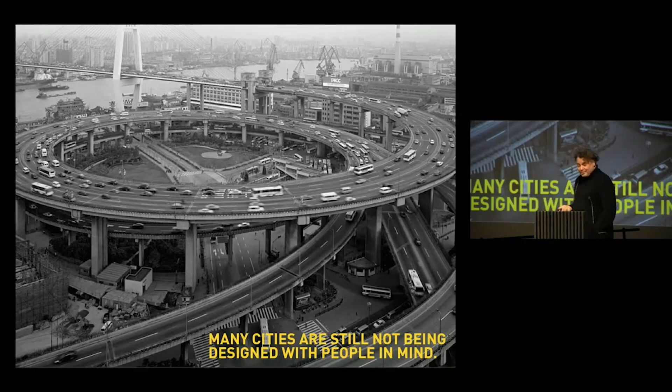Places are becoming increasingly homogeneous, increasingly generic, and you don't know if you're in Asia, Europe, South America, and so on, because similar types and similar language and similar responses happen everywhere.

And obviously, with the aspects and emergence of climate change, we are all at risk. This poses a series of challenges for us architects and urban designers that are common in many different places.

Certainly in our practice, we feel there are two fundamental challenges that relate to cities today. One, that I'm not going to talk about, is what to do with suburbia—the sprawl of cities related to the popularization of the car, which creates one type of city. At the opposite end is high density and tall buildings, and how we are living more compactly, and how you create good places with these difficult types.

So we started with this notion of the skyline, and the tall buildings as a sort of fabric, and what is the sort of city that this generates.

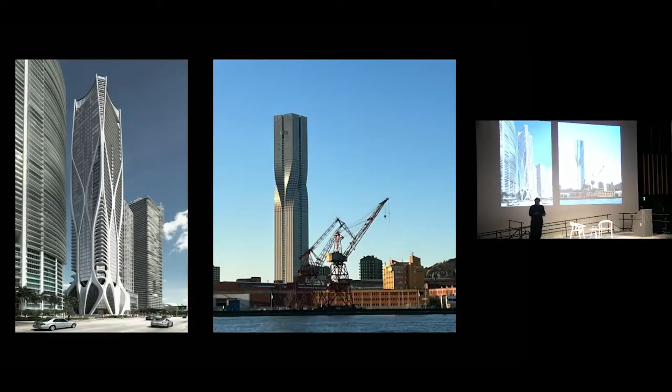Like Zaha did in Miami, or the SOM building in Gothenburg—well, these buildings could be more or less interesting, but they are aloof, self-referential, and objectual. It's very difficult to believe that you can create a city that is mostly fabric with this type of building, because their purpose is self-referential and a little bit about seeking attention. We are on a slightly different wavelength.

We are perhaps in a different tradition in our practice, one that tries to combine the pressures of densification and height with a different approach. Can these buildings be part of the fabric of a city? Can they be contextual? Can they step back in relation to their objectual nature? And what are the different strategies you can apply for that to work? These are not solutions—perhaps only partial answers to an anxiety about the fact that these buildings are part of cities today. Is there a way of dealing with them that makes them part of the fabric?

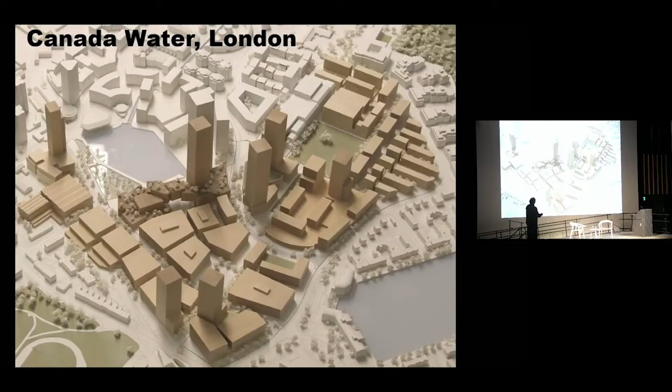This is a master plan that we have been doing for 15 years in London, in Canada Water. It's called that because it's where timber that came from Canada, or went to London from Canada, was stored. We have been working on this master plan for a long time, and we were also the architects of these two buildings.

That is phase one. This is an area that is incredibly central. You see Tower Bridge there, that's the City of London. Then you have the river, and it's this area here, and we're talking about this building in particular, this couple of buildings. It's a part of London that's very central but feels a little bit secluded, a little bit detached, due to transport and other conditions.

That's an image of the building, and we like to call it a single tower. This was part of the master plan, which includes a cluster of other tall buildings in the area. The typology has a podium and tower on top, which we began to question when we started the actual building design—was it a hybrid building, with office and workspace in the lower floors and a residential tower on top.

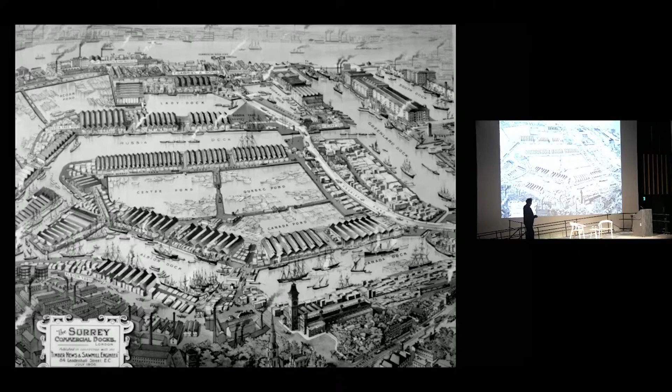It's a context that, like many in London, sits in between conditions—lots of Victorian and utilitarian 19th-century architecture, where this was once a working dock, but at the same time has a presence in the skyline due to its proximity to the river. These were the docks when they were working docks, and this is the dock office—one of the remaining Victorian facilities still there.

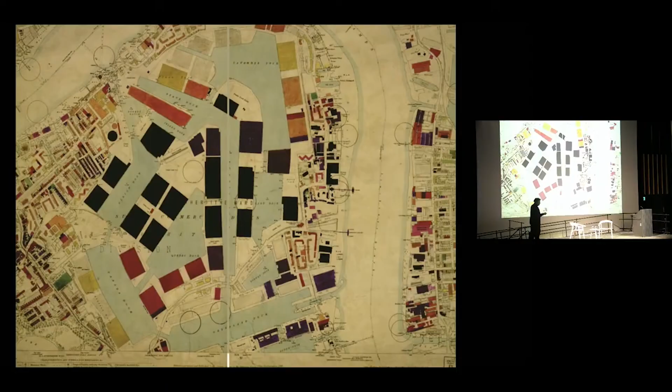This is a fantastic map of the bomb damage after the Second World War. What's interesting is that black shows what was destroyed, and that's where things remained. What's interesting about that map is the combination of big things and very small things—the big things were the sheds, and then you see the grain of houses and docks, the more nimble buildings of the Victorian era.

So our project tried to mediate between these scales of large things and small things, with a building that, by its size and height, was going to be a big thing on its own. It's a core preoccupation of ours in the practice—how, as buildings become larger, you don't lose the small grain of things. You still have, at the very least, mid-grains. If a small grain isn't possible, how do you break down these buildings to establish a mid-grain condition.

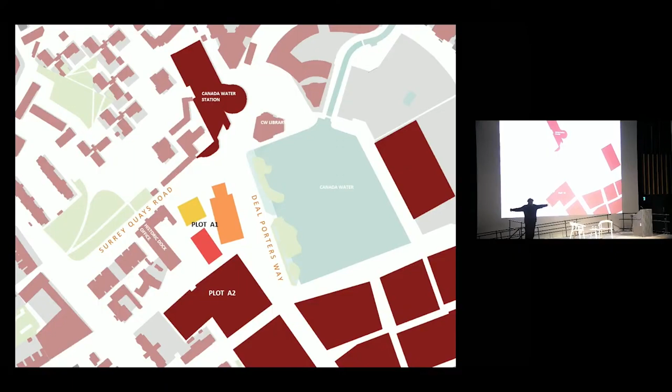Breaking the mass into smaller components allows us to create a transition between this larger scale and the smaller scale—that's the historic dock office I pointed out before—establishing a literal transition between things addressing the larger scale and things addressing the smaller scale.

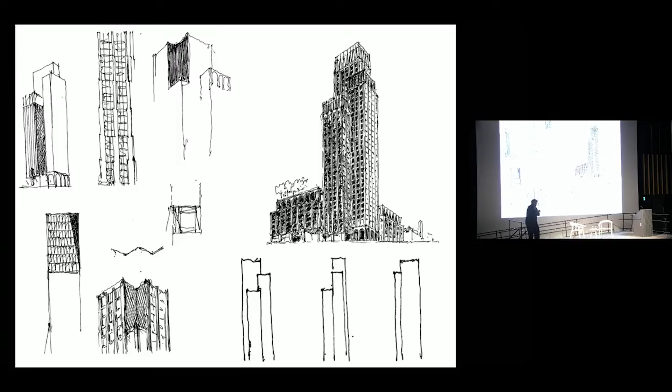This was a sort of inspiration you'll see elsewhere in tonight's lecture—how a building that could be a singular thing becomes a bundle of things, a tower made of three towers. This breaks down the scale of the tower, but more importantly introduces the notion of orientation: seen from different places, the tower looks different. This lets the building perform one of the fundamental roles of a tall building for us—the legibility of a place from farther away, so you can locate yourself and say, over there, 500 meters away, is where the tube station is. If I'm looking at one side of it, I know if I'm facing north-south or east-west.

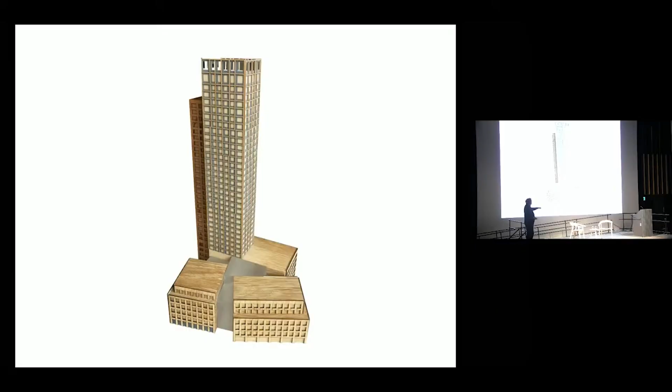That allows, in a sense, the configuration of the internal, also a sort of a design of inside-out in relation to the tall building. So it became a group of buildings that have warehouses for workspace, brick warehouses for workspace in the lower floors. There were 3 brick warehouses, and then the tower interlock on the side that was also broken into 3. So we sometimes say it's 1 building, but it's 6.5 buildings.

3 warehouses, 3 towers, and this connected piece in the middle. What this generates is that when you see this from afar, sometimes you see 3 forms, sometimes you see 2 forms, and sometimes you see 2 forms from the other side. You see that then the lower bit of the warehouse starts to help with the transition to then the scale of this kind of a building, 19th century and early 20th century.

So then this building has a back and a front. It has a response towards the dock office and another response towards the water and the dock. And then as you see it from afar, then again, sometimes you see 2 forms, sometimes you see 1 form and so on, like here from the park. Sometimes you see 1 flank, sometimes you start seeing the 3 forms, interlock, and so on.

So it's, at least in our view, in our opinion, a tower that is responsive to how it sits in the city. And you can literally orientate yourself in relation to where you are seeing, if you are seeing from this dock office, or from docks, or from the water.

But another thing that we were wondering when we were doing this one, another tower that I'll show you later, can a tower be contextual? Or can a tower be of its place? Or can all these buildings always be kind of self-referential and so on?

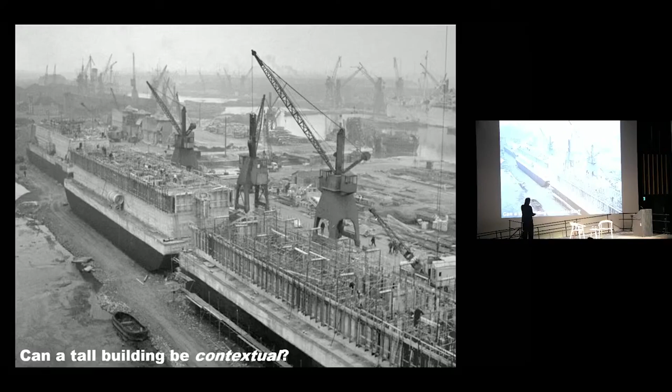So this is a photograph of the docks when they were still working. And when you walk around this area, you see a lot of these things. You see a lot of remnants of the steel kind of basculant bridges, cranes, brick buildings with this kind of interlocking of brick and metal and timber that was obviously one of the sources of inspiration for this interlocked tower.

And so on, and from the language that then we were exploring, sometimes in these models, so how the towers started to become kind of a reference to this architecture of the area, but obviously done today with a unitized and modular construction that then allows to have this sort of a metal tower that feels industrial, has a relationship.

And sometimes you can walk close to those red bridges, and then there is a connection between that path and then this tower of the 21st century.

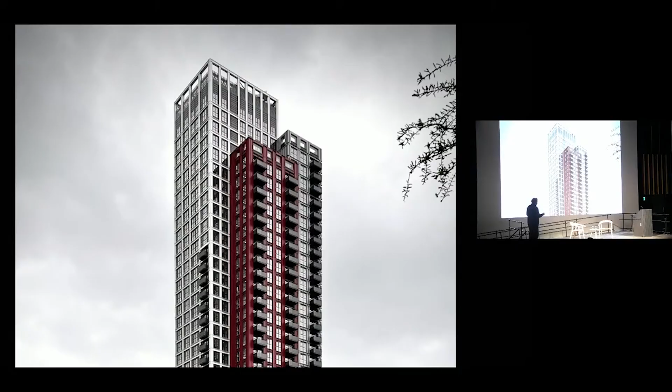And you get this layering then of a brick warehouse, that then when you are closer to the ground, and then this metal tower, that then is a sort of an interlock of forms, generated with panels, sometimes more vertical, sometimes more gridded, that then generates a place that, well, from this side you see the 3 towers, from the other side you see only 2.

You have a connection with this new red bridge, and there is a basculant bridge just behind us that generates a sort of tower that, in our view, feels of its place.

And that's a strategy that we're also trying to apply in a project that we are doing right now here in Toronto, in Quayside. It's a competition that we won not too long ago, and we have the lowest tower in this ensemble, but it's fine. And it's interesting because it's sort of a central location.

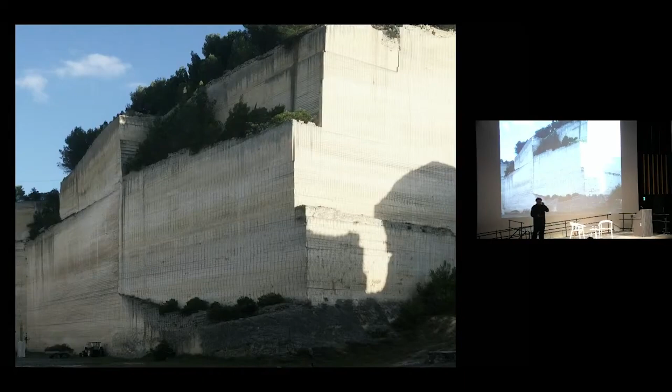And obviously, when you are doing a tower in Toronto, the most obvious reference is a quarry in Italy. So just check the size of the structure, just to grasp the scale of this quarry in Matera.

And we were interested, because it's perhaps one thing that also runs through some of our work, this notion of step forms. And the step forms would happen when you have horizontal ledges, that then greenery starts happening there. And that was one of the formal strategies, how you make these big things broken into smaller things. You start introducing human scale in large buildings.

So these were some of the sketches that we did in the early stages of the project, in which, as the building comes to the ground, it's almost sculpted and carved, and you have this step form that then generates a series of terraces where greenery can basically happen. And that greenery relates to, in the overall master plan, SLA, the landscape architects, have proposed this urban forest and how that can literally go up the building.

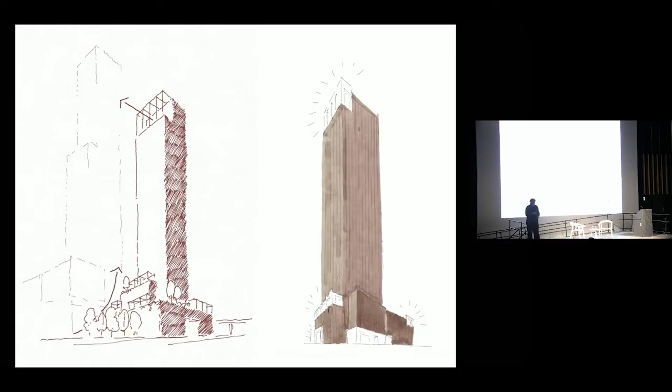Above that, the building starts to become a little bit purer, but then is punctuated by this series of small elements, almost little jewels that are, in a sense, small pergolas, pavilions, entrances, porticos, that once again bring a smaller scale into a large building.

And the important thing for us in relation to each of these things is that they have an urban role. Some of them are entrances, literally addressing the street. Some are pergolas and pavilions that relate to amenity, places where we gather, or this one we call the lake room, which is a sort of amenity space at the top of a building.

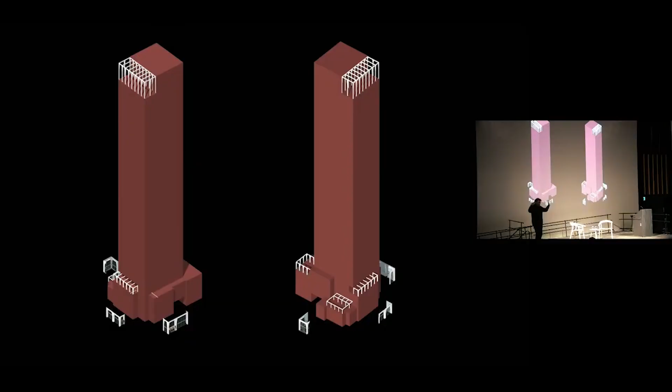So these devices do two things. On the one hand, introduce a small scale in a big thing, like some of those cornices that we were seeing in the Louis Sullivan buildings, that have that role. But the other thing, again, is to give orientation.

So when you are seeing this building from the lake, there's going to be this room at the top. If you are seeing from the city, from downtown, you will not see that. So it's a building that has a back and a front, a back and a side, giving orientation to the whole building.

So they have different degrees of civicness, if you like, that we apply as a family of devices, a family of elements. Some of them are really big, or rather big, relating to an entrance for a community center. Others are more modest, an entrance to the residential part, and then there's a series of other elements that happen in other parts of the building.

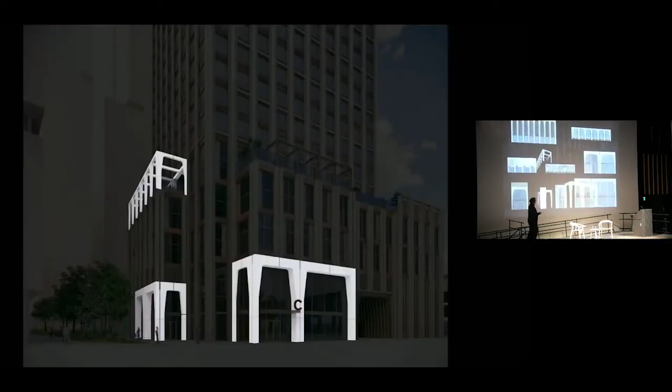So these devices have an urban role — some of them are entrances, some are terraces, or at the top of a building generate a kind of overscale rooftop loggia, because, in a sense, it's at the scale of being there, but it's also at the scale of the mega urban room that is Lake Ontario.

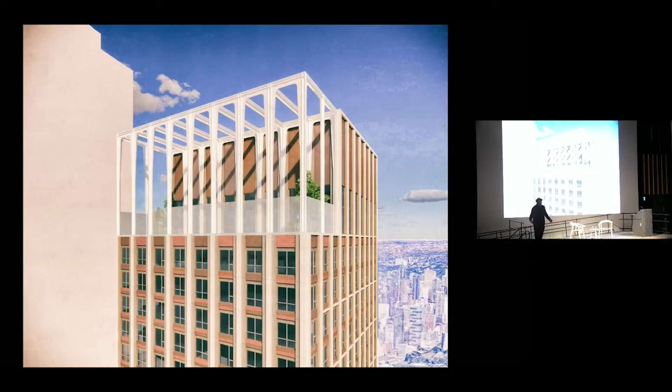So then, if you are close to the ground, the building is curved and softer, with all this greenery going up, and the form is perhaps less clear because it's curved — it's Matera-like, it's quarry-like. As you move around, some of these devices addressing the street start to become clearer, giving a sense of direction of where you enter and where the civicness of these elements is.

And then, as you start seeing it from far, the building starts to become calmer and more rigorous and elegant in our view — hopefully timeless — present with that oversized rooftop loggia that probably, in a few years' time, will be a really nice place to look towards the lake.

Then what happens when you have more than one building? You have the opportunity to have three, four, five buildings, and then you have the pleasure of playing with the space in between buildings. Like in this sculpture of Giacometti, with these five figures — their individual figures are interesting, but it's the tension, proximity, or distance between the figures that generates the overall composition.

Or Morandi again — in his etching it was really interesting because it was emphasizing not the bottles, but the space in between the bottles.

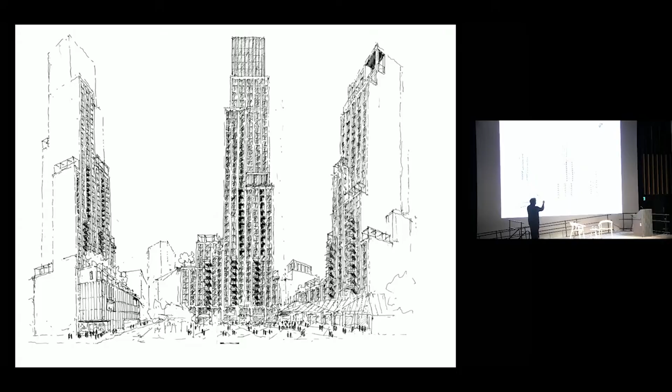When we are designing groups of buildings, you start having the possibility of looking at how three buildings come together. In this sketch for the Christie Cookie master plan we did some years ago, these three buildings are a family, but the role of the building is what happens in between.

If you go to the Dominion Center, you have these buildings and that funny-looking golden one that I think is actually quite cool, you have this group of things looking up. In the case of our Christie Cookie project, you have three buildings, and two or three more in the context, that frame the space as you look up, but perhaps more importantly, frame the space where you're looking down.

They become landmarks—not landmarks in the sense of perfume bottles marking the land where we meet, but because these buildings are literally shaping public space. The important thing, in our view, is not the three towers themselves. They are going to be cool and beautiful and elegant, but the most important thing is that from afar, you see this group of three buildings and know there's a square there, marking a point of public space. We've applied this strategy in several projects.

This is one in London, called Key Bridge. This was, I think still is, the highest density residential development in London—super high density, with really tall buildings for London. They're kind of funny for Toronto; they're only 36 stories, which is a mid-rise building here. But for London it's tall, or tallish, as we like to call them.

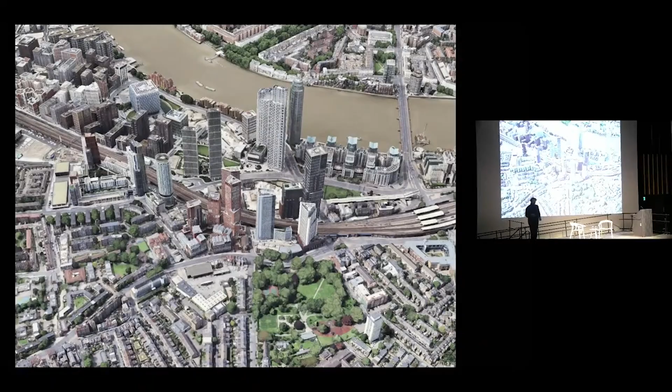This is a very interesting hinge location in London. There's all this new development over there, and that's the American Embassy. This whole area is called the Nine Elms, an opportunity area—one of the zones in London with a densification program. There was an extension of a tube line, and several opportunity areas were defined in the London plan. We won a competition to do this project here.

Depending on who you ask, it was on the wrong side of the tracks, or the right side. We think it's the right side, because here is what's called a conservation area—terrace houses and a park. So the building literally hinges and transitions between this new London and this old London. The project has a role in mediating between these conditions.

If you walk around, there are what we call mansion blocks—mid-rise buildings, two or three remaining in the area—and some at a terrace house scale. This is a pub, a brutalist building that exists on the site, very interesting. We tried to keep it but it was impossible for many different reasons I can expand on later.

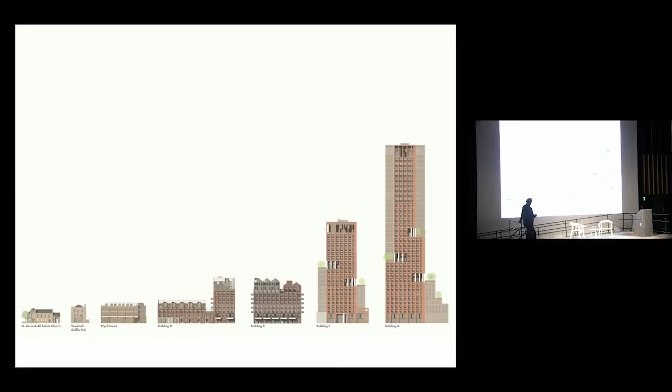What we said is this project could be what we call a typological ensemble—depending on where you're seeing it from, it responds differently. You have a bit of the scale of three or four stories, a bit of the mid-rise scale with these mansion blocks with interesting white things on top, and a bit of tall buildings. So you create these different typologies coming together on the site, giving a notion of transition, but also, importantly in a high-density development, a sense of choice.

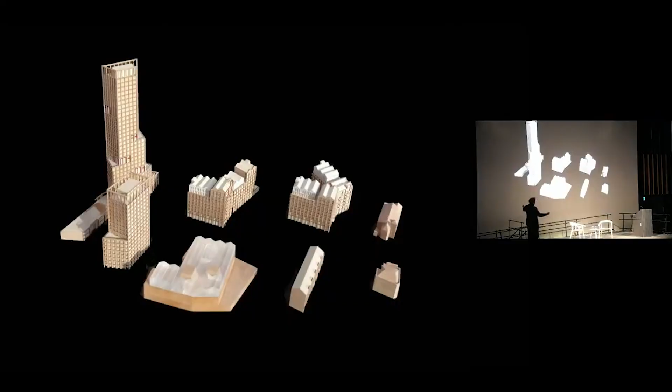You might live here, you might live here, or you might live here. You have all these different typologies of buildings, but also typologies of homes that can happen there. So we studied all these buildings separately. There are buildings that are small scale, mid-scale, and large scale, all coming together in a very high-density development, in which a third of the site was public open space, making the whole thing work incredibly well in planning terms.

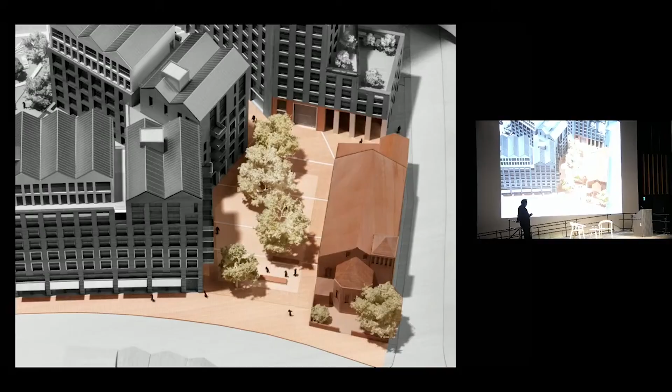So this generated the possibility of shaping the spaces using the buildings to do so. This was a Victorian church that was neglected, around which we did a new square. That square was faced by one of these mansion blocks, a 36-story building. But when that 36-story building lands and comes close to this building on the street, that is only 4 stories, you see a building that is literally stepping down to meet the scale of the Victorian church, with other datums at 9 stories relating to the mansion block.

Then you crop the view, and there are another 25 stories above that. What's interesting is that for most normal people, not architects, normal people walk like this, not like this, because you might hit yourself if you do. So as long as the space is properly shaped, the buildings are just part of the fabric. That's, in a sense, what we feel happens there.

Similarly here, the buildings are disposed to generate this large space, above which there's a 24-story tower. But the role of this whole composition is actually to frame this little building over there — the Victorian church, and another building that was a listed Georgian terrace house. So the role of this large, high-density complex was to incorporate pieces of the history of the site into a wider composition that is legible, that is, literally, a piece of city.

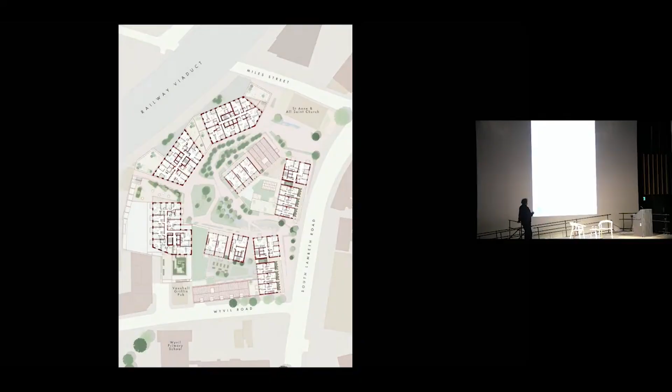But the thing we really like about this is the spaces in between, and how the group of buildings generate these peculiar silhouettes and peculiar spaces — we spent a lot of time just sculpting the air, using the mass to create interesting space between the buildings whether you're looking down or looking up.

That tries to pose the idea that you can do tall buildings of that scale that feel relative. They have a lineage and connection with this mansion block, this richly textured architecture of the end of the 19th century, creating high-density development that's trying to be more in dialogue with this old London, but also recognizing the scale of this new London that's emerging. We also tried to do that here, with this group of buildings that shape a space.

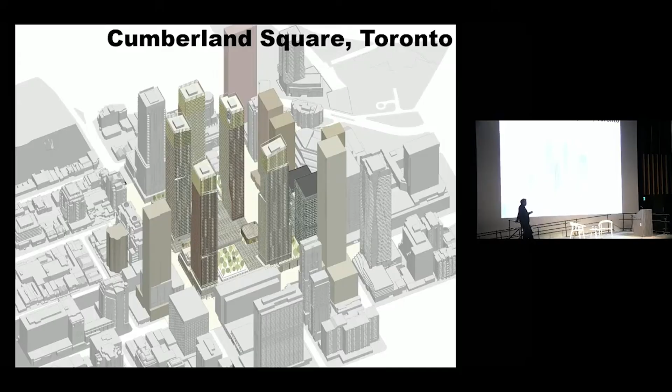This is the first project we did in Toronto. It's a competition we won, in Cumberland Square, Yorkville, or whatever it's called, because it's a very complex site in which we were very excited, and we were invited, and we won the competition, worked on this for a while, but then land issues — it's a very complex project. We started with these 5, I think 65 stories or so, 70 stories, a family of buildings.

Some of them have funny heads and share kind of haircuts. Some of them look a little bit like that, or turning around — they're figural. But the important thing is that they're a family, because we weren't interested in them as individuals. We were interested in them as a group.

They create a group, a little bit Rockefeller Center-like — not in the sense of Rockefeller Center itself, but it's interesting because it's a piece of city in which all the buildings are very similar. Some are taller, some are lower, but they share a DNA. That's what we were interested in here.

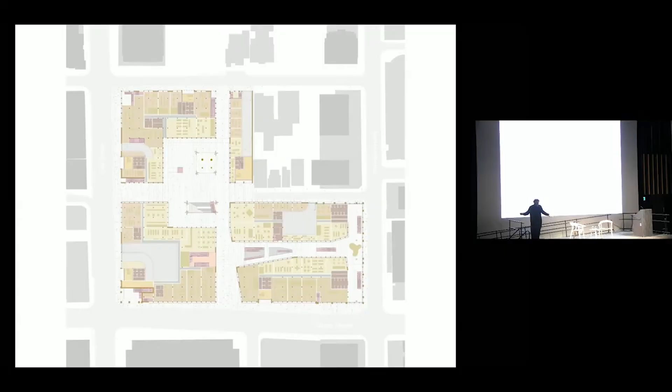The most important thing about these 5 buildings was that they shape a space in between — what we imagined could be a sort of covered square, with the footprint of 5 tall buildings, but when you're there, really that's not what you notice. What matters is the space, again, the space in between.

So you have 5 buildings — one of the things we've tried to do several times — shaping that space. It's a space you go to and a space you go through, because it was also a route through, in which we were interested in how the facades facing the square belong to the square, not to the buildings.

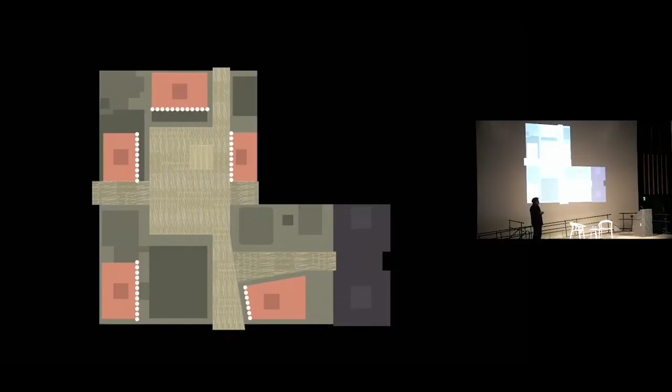A la Santa Maria Novella, we said we should have marble, white marble, on that facade, so those 5 facades for those 5 elevations share something. Of course, with value engineering, it was never going to be marble, but it was going to be white — white because it catches light differently than the other side. So that facade was the primary one, and the others were secondary.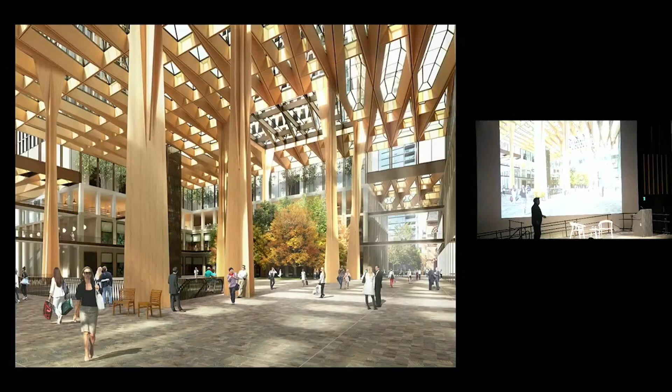The 5 buildings together shape a space, create a space that we felt would have a very interesting group of golden, brass-like metal lanterns at the top. But the most important thing was this covered square that you could go through, and on top of that were 70-story towers that, funnily enough, were secondary to this covered square.

But then we got to the last challenge — when you have 15 towers, 20 towers, 25 towers, when you're designing a piece of city, not just a block with 5 towers, but a whole district — how do you deal with putting a lot of towers together? That's challenging, exhilarating, and scary at the same time.

In cities like this, I've heard you have certain pressures about building homes for Torontonians. We have the same issue in London. It's a fantastic problem to have, because it's a problem of successful cities where people want to be, but it's a problem nevertheless. And then, how do we always provide homes.

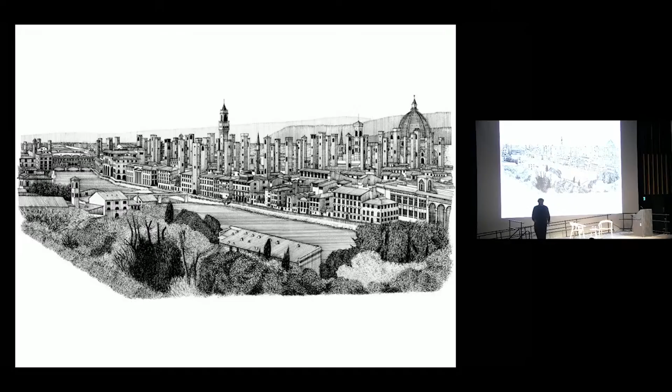This is a speculation of how Florence would have looked in the 15th, 16th century, with a lot of towers, because this competition of who has the tallest tower has been eternal. It's not something about the 20th or 21st century. This is speculation of all the medieval towers that used to be there. There are like 8 left. In San Gimignano you still see some, where wealthy merchant families competed against one another for presence and prestige.

In London, there were all the spires of churches and so on that also create a sort of skyline of tallish buildings in relation to the nominal fabric of a city. In a sense, the cities we like the most are the ones with a lot of fabric, where buildings, like in London, Paris, or Bologna, are typological variations of the same thing. It's the same family, the same type.

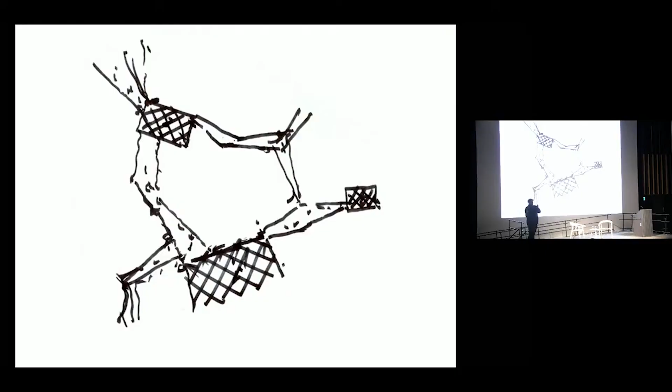This is a sketch that we did in the first week of the competition that still remains the bones of the project. That was a sketch of the spaces: 3 squares informally related to one another, so that when you go to one, you literally meander. That's still the base of the project today, with one large park, 2 squares, some lanes, some groves, some largos. There's a midpoint between a street and a piazza.

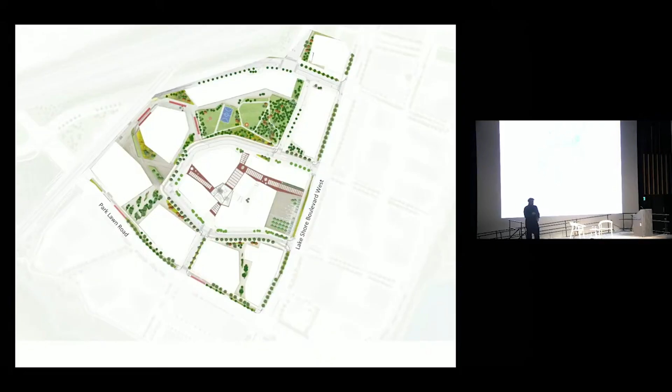The most important thing for us in relation to the structure of the master plan was this drawing, which is super mega high density, really, really high density. But 42% of the site was open space, so you have this counterbalance of a lot of buildings and a lot of open space. Because we split it, we didn't want one super mega large park. We wanted some lessons from King's Cross and other projects we've done in London, so you split it into different pieces to give choice. Some spaces are intimate and tiny, some are mid-size, some are really large, some are green, some are hard landscape.

I don't do nature, I don't like green stuff. I understand it's very important intellectually, and my landscape friends always tease me about that. My wife loves green stuff, so you learn in life that having diversity of choice is very important for cities and marriages.

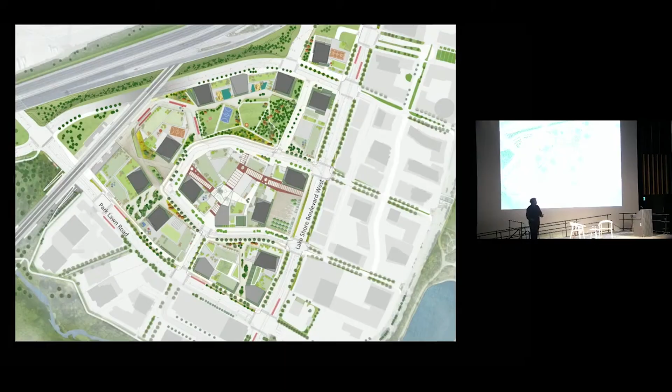This structure of open space is the backbone of the whole master plan, within which the buildings are again secondary. The buildings are all very simple. We like rectangular buildings—they are easy to build, flexible, resilient, they can change. But they are informally placed in relation to one another. This is something we call urban picturesque.

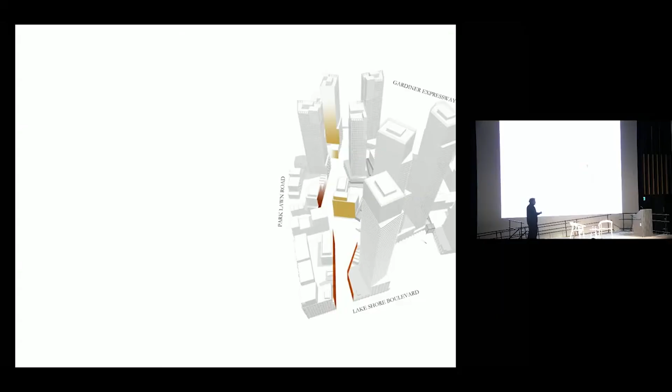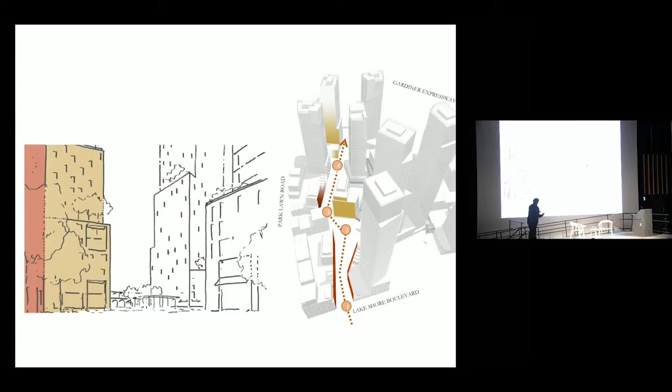So we did stuff like this. You arrive at that point, and you have one building on one side and another building on the other side, and the building flexes. When the buildings open up, you see a building in the back that's not tall but is frontal to you. As you walk towards it, the street pushes you to one side, and then you see another couple of buildings over there obliquely. You start seeing that they're there, but carrying forward. As you keep walking, that building starts to become a flank, and you see the flank of this tower, which we pushed out about 8 meters, so you see part of it but not entirely. When you get there, it literally drives you to the new train station square.

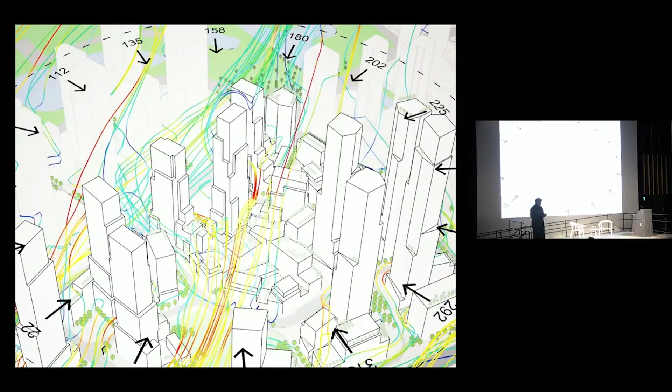Everything in this project was done like that. The buildings are informally placed relative to one another, but everything was a journey in which what we were composing was not how the plan looked, but how you experience moving through cities, because what really matters is the journey and this notion of a picturesque experience as you move through. But also how it's shaped is shaped by the environment, and maybe we shouldn't take credit for that—it's an interesting coincidence that this informality in plan works really well in environmental terms.

Red is bad, blue is good. This is the cold wind that comes from the lake, when it's minus 25 in winter, in January or February. In a gridded city, the wind accelerates. When you have this informality, you create obstacles, so the wind slows down and you have better conditions where it matters, at the ground floor, giving more usability of the public realm as you get into the colder months.

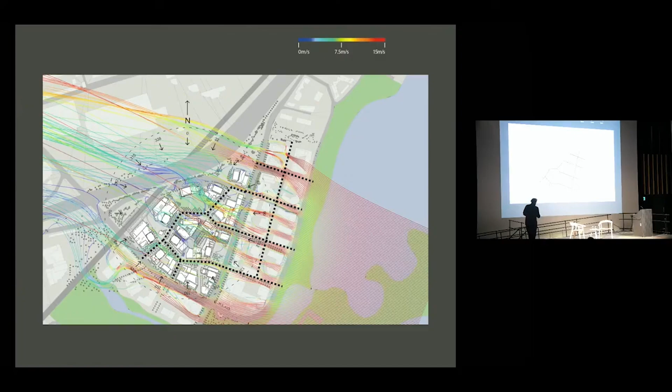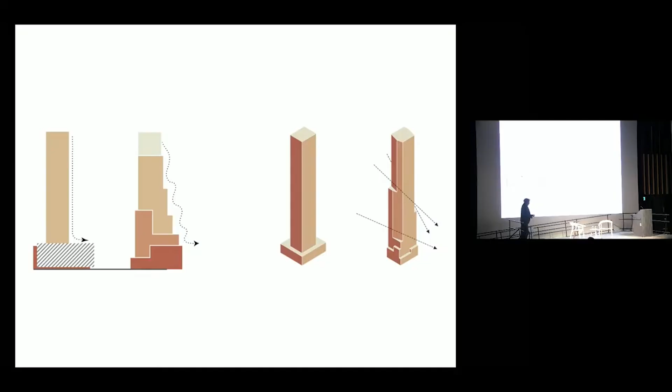What this generates is that these 15 towers were all very specific to their site. They were all a family, but shaped and cut and carved to create this notion of, rather than a tower and podium, a sort of stepped form that helps with the wind, but also helps with daylight in relation to where it matters in the public space—again repeating this idea at different scales, families of buildings with mid-rise, low buildings, low towers, mid towers, or very tall towers.

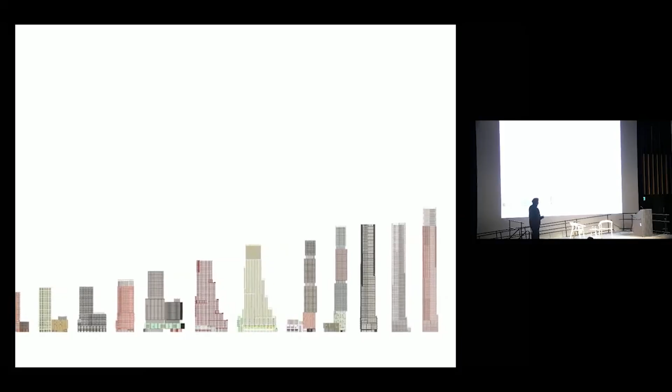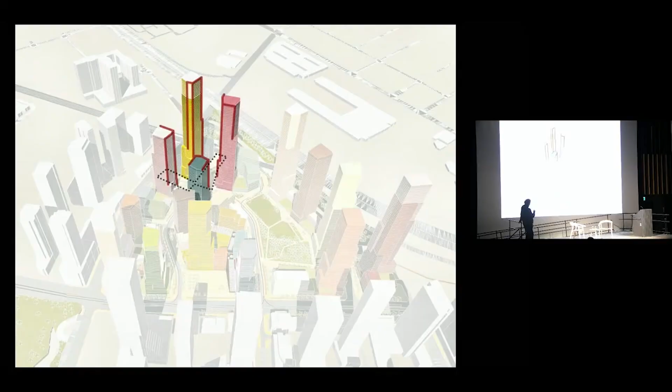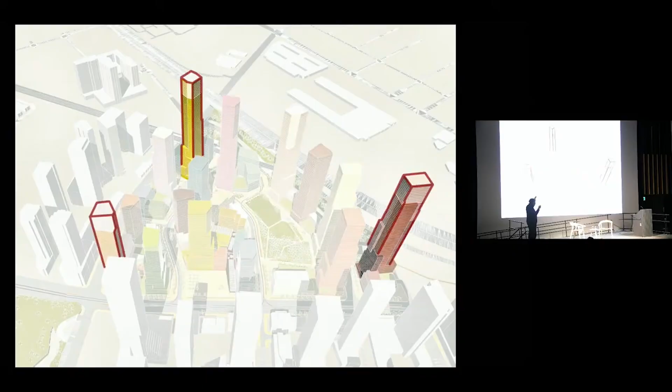So what you have here is a diversity of typologies that we studied separately—small things, large things, and a series of blocks that were all very different, sometimes a single building, sometimes 2 or 3, creating a piece of city within which buildings shape a space, a square, or a station square. These 4 buildings, or a larger group, shape the park, which even buildings across the street were part of. Then some buildings at the corner become gateways and lanterns, generating buildings that respond to the different scales at which you perceive this.

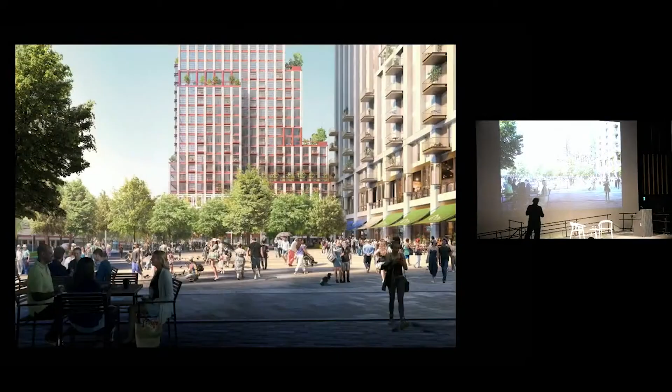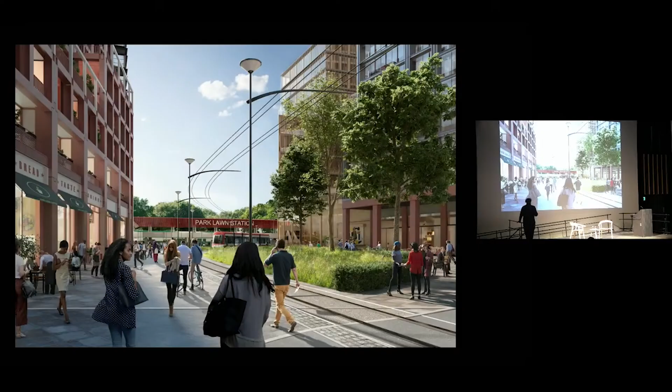These are projects generating this notion of what we call composed informality—very Morandi-like, where buildings are tall and mid-rise, all coming together. In these spaces, heights go from 18 meters down to 6 and open up to 20 again. There are buildings that are 65 stories, some that are 7, some that are 40. In our view, it doesn't matter—the height isn't what matters, it's the space in between, and how you move from informal spaces to larger, more formal squares, to streets defined by a new edge, all triggered by public transport. Otherwise, these densities wouldn't be possible.

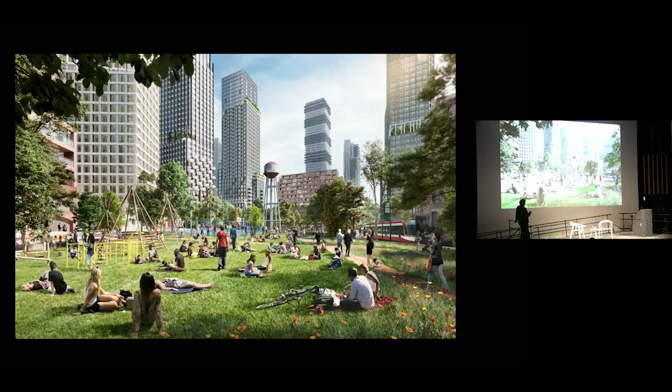Spaces that are covered, so when it's minus 20 outside, here it will be minus 5, usable throughout winter, leading to alleys that coincide to create a juxtaposition of small and large scale, and parks that serve the development but also neighbors outside the site—creating a notion of informality that feels as if it grew organically, as if it had always been there. We've done this, there are only 2 more.

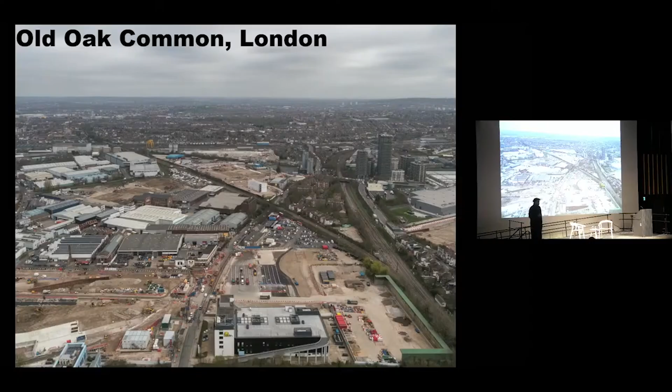This is an even larger scale, a couple of master plans, one in London and one in Toronto. This is Old Oak. It's an enormous part of West London, one of the industrial engines of the city. And here, what is interesting is the role of tall buildings in the generation of homes.

In the mid-19th century, it was farmland. Then it started to be industrialized, and you see the arrival of trains and depots and so on. Right now, it's like this. This is Park Royal, one of the more important industrial areas of London, with a new train station for HS2. So all the land in public hands needs to be densified and regenerated.

Again, a place of a lot of contradiction. You have really bucolic areas like that. You have industrial areas like that. You have this new London of tall buildings emerging. And then you have this, between canals and natural reserve alongside the train lines and so on.

Rather large, so 20 hectares, almost 8,000 homes, 20,000 people. It's a large endeavor with public money, led basically by the city. I'm not going to explain the whole master plan, this would be too long. So it is a very piecemeal and very complex site.

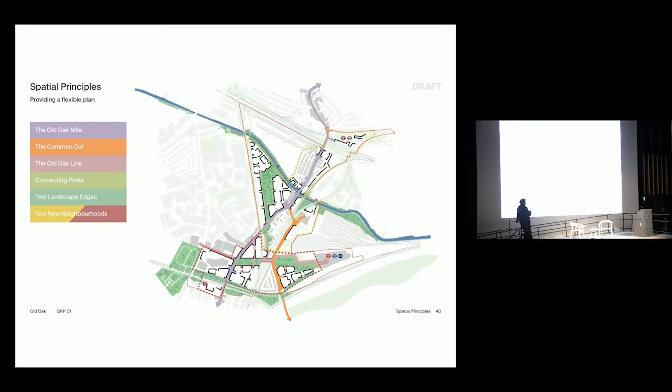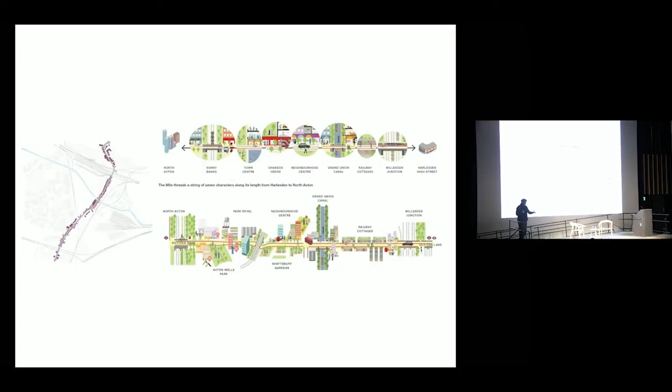There are 6 principles there, but it's effectively 2 neighborhoods - what we call the Old Town Center and the Canal Side neighborhood. Suffice to say, we have these spines that connect across. What should be the role of tall buildings that happen opportunistically on sites, and what is the legibility that you give to this wider composition that is by nature heterogeneous?

This was a very pivotal slide in the whole development of the project. This was when we were addressing the skepticism on the part of the client around tall buildings, saying: look, you guys have here 120 buildings, of which 110 are residential, of which only 26 are tall - tall defined by the GLA, Greater London Authority, as above 20 stories. But crucially, those are 20% of the buildings, but it's 55% of the homes. And the public money and the public side has the duty to generate homes for Londoners.

So then the discussion of tall buildings relaxed, because it was not so much about having them, it's how many of them, and where, and why, and what is the role. So Morandi again, and this thing of how he concentrates tall bottles here, tall bottles there, and there are valleys in the middle, and the composition of these different figures.

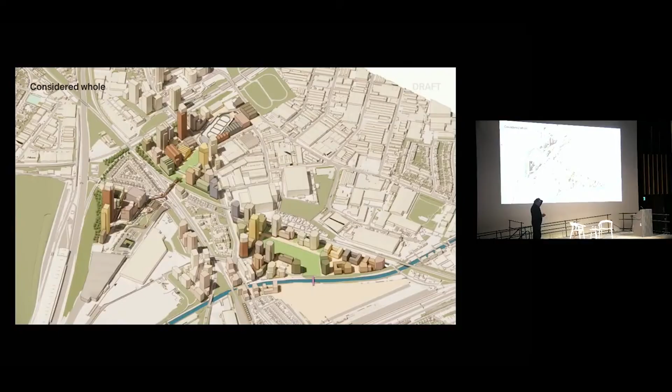And this is the whole of the master plan. Again, I'm not going to walk you through all of it. But what's interesting is that of those 26 buildings, we told the client, really what you should care about is only 8 of them. And those 8 buildings, you should be incredibly prescriptive in relation to design codes and the role they should perform. On the other 20 or so, you can be relaxed about it.

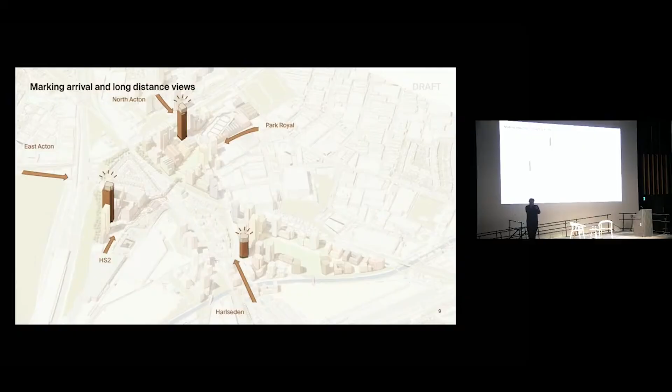Why these 8? Because they have a role in how you read this as a piece of city. You have 3 towers that are arrival towers. When you arrive from Holston, when you arrive from North Acton, when you arrive from the HS2, there's something that receives you, and something that addresses you, so that you know you are literally arriving at this new piece of city.

Then there are, although the client didn't like the word, these landmarks. We call them landmarks because they're towers associated with the 3 large parks. So when you see these towers, you know that there's a park there. And so on, so they have another kind of legibility. What we did, diagrammatically speaking, is try to link them together.

And then we wanted to have 2 Flatiron buildings somewhere, because Flatiron is very cool. And when these 2 neighborhoods, which for some reason ended up as 2 triangles, meet at this point, we wanted to have 2 buildings that were a couple, literally talking to each other and marking the point of conjunction between the 2 neighborhoods.

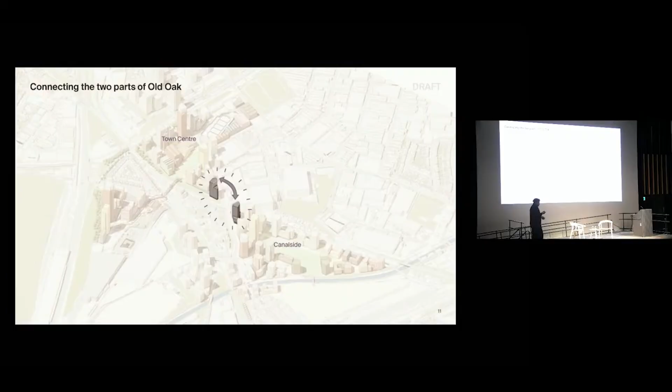And what we did, in a sense, to convince everyone that this sounds more or less convincing as a theory - but what really matters is if it holds up when you walk, if you read them, and so on.

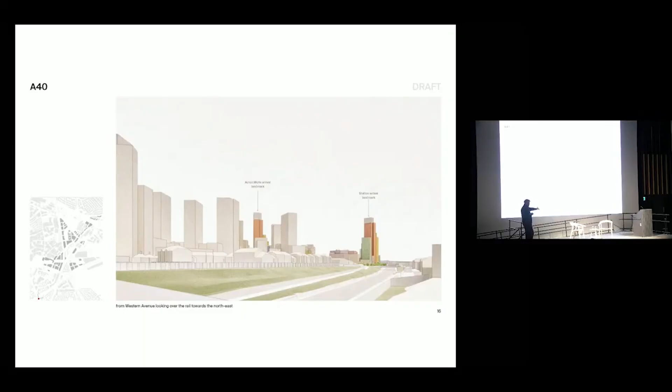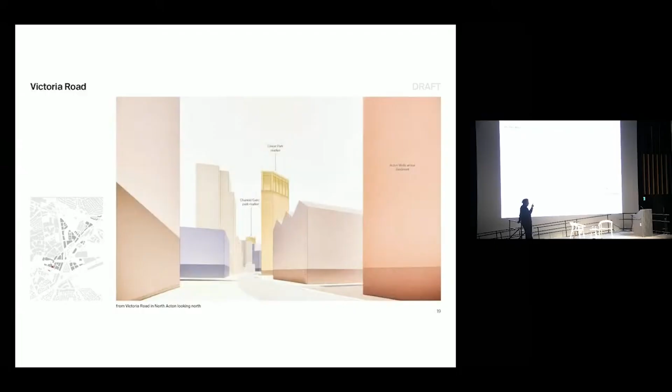So we did literally several of these walks, in which at this point you see one landmark and the other, and the towers start to give you a sense of size, a sense of distance between one end of the site and the other. As you start walking through, that one obviously disappears - you walk, and then it reappears again. And then you carry on walking, and start seeing the ones that are the landmarks related to the park.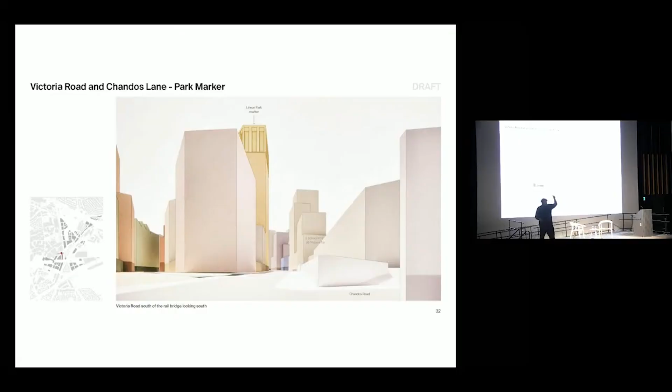From the other side you have similar things - you see one of the landmarks related to the park, and then when these two flat iron towers are talking to each other, you see some of this. So basically, as you walk through, imagine that you live there - these buildings start to become part of your daily journey, allowing you to situate, 'meet me by the landmark over there, that tower with the funny hat,' and so on. They become points of legibility for the whole city, allowing you, as you walk through, to start recognizing these elements happening around you.

Final one - this one in Toronto. Now we are working here in Toronto, part of an amazing team with the SLA, GHG, Traffic, Momentum, and so on, and obviously Waterfront Toronto, working on the shoreline with an immense amount of effort - some of the most mind-blowing city-making work we have seen anywhere in the world.

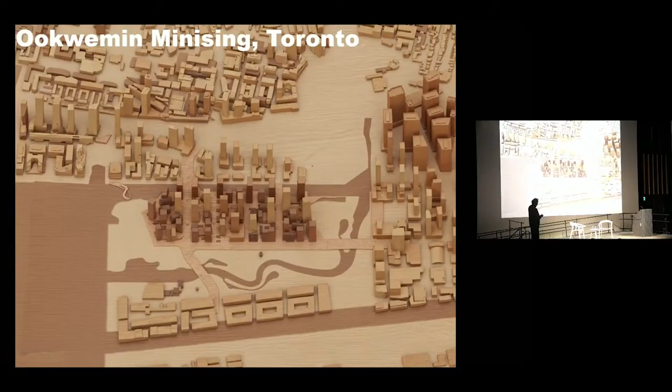Because it takes real effort to reroute a river and generate this amazing park - an endeavor that's been going for a while - and create the opportunity for this incredible park, which I'm sure you've all visited, that is really fascinating as a piece of infrastructure, but also as a piece of public realm and landscape.

Working with this, how do you combine this notion of density, high density, with a reconsideration of what a street is in this particular part of Toronto? There was a lot of work in relation to the legacy of industrial artifacts, the landscape, the character of different streets, the space for nature - they started with nature, they started with the spaces, and the buildings came later. We literally came later in the design process, to understand how buildings contribute to the definition of the spaces in between.

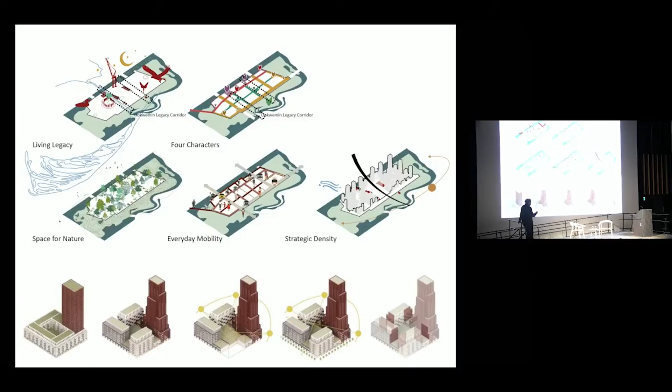And there were, obviously, as in that project in London, questions about the role of the different buildings in defining the different edges of the site. What is the edge towards the park, where you have mid-rise and tall mid-rise buildings, defining a gentle edge towards the park?

How is there an opportunity to generate something like the Keating Channel, an urban room, where you have the two sides of a canal defined by buildings, a central street with low buildings and mid-rise buildings, like in that project in Coal Drops Yard. There is a site in the middle with another private owner - how do you incorporate that into a wider composition?

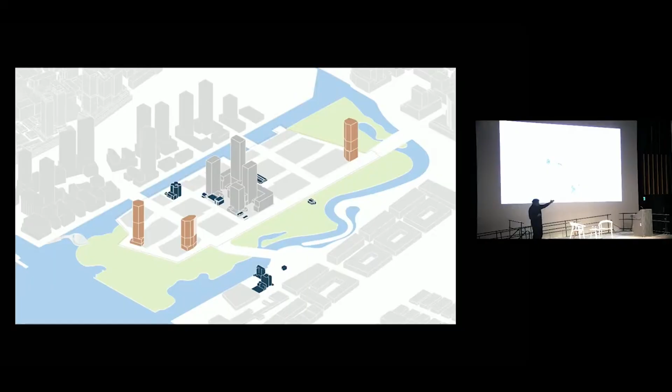And then towers that relate to points of arrival - those towers could be more special because they are literally the elements through which you are arriving, giving legibility and access to the whole thing. So this is the overall composition.

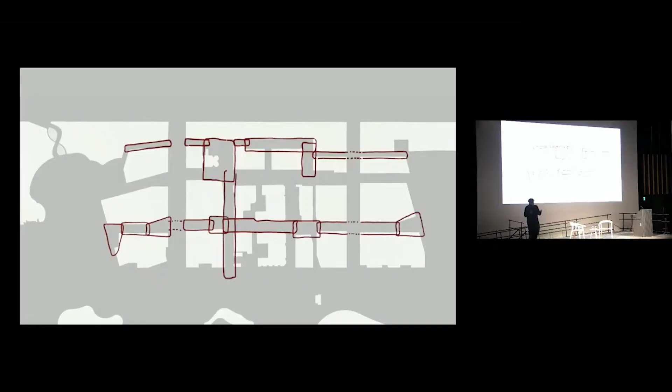Again, what matters to us is how you get to this - the figure-ground of the spaces, where you have a sequence of spaces. Some are larger, some are thresholds, some direct you in another direction. You have compression and expansion - even though this is still gridded, within a grid you can still achieve that - giving a sense of hierarchy to the journeys, which gives way to a series of open blocks where some buildings are tall, some mid-rise, some low, with a lot of space and air in between.

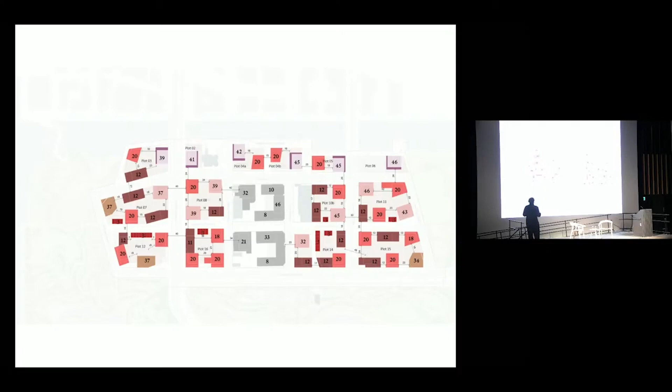I'm not going to go into all the distances between buildings, but suffice to say it's very porous, with many different views. A similar strategy involves combining different kinds of buildings into hybrid blocks, where each block contains all typologies, giving diversity of blocks - and that is what good cities are.

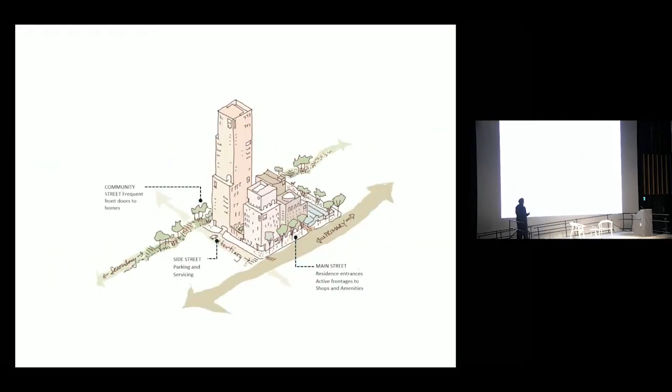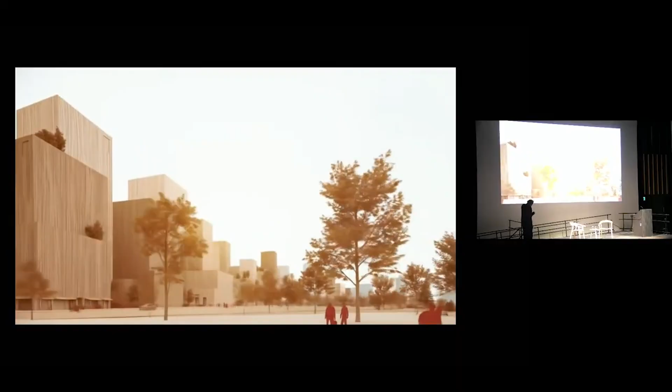And hierarchy in relation to all the different frontages that these urban blocks will face. That will generate, in our view, an experience that will be quite interesting when you are facing the park. This kind of a curve, a frontage that goes up and down and is gentle, and the greenery goes in between. A side that feels dock-like, almost like this Keating Channel, no more industrial, that is part of the heritage of this area, that then as you move inside, have this smaller scale.

You have townhouses in this kind of district that could be quite surprising in our view, incorporating things like the silos and then creating a new square next to that, that will generate a space that would be high density, but in our view would be really varied, have diversity of building, diversity of choice, and so on, and hopefully will contribute to the skyline of this amazing city of yours.

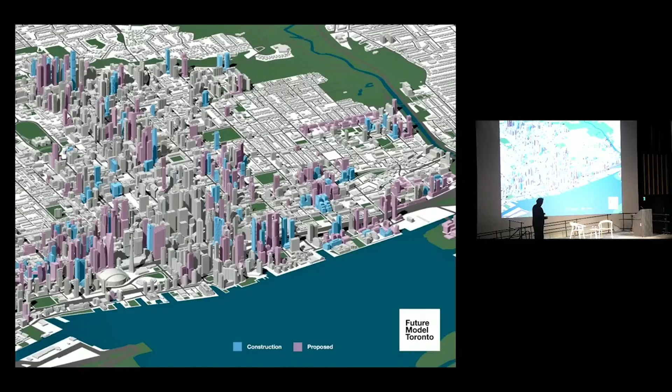Last few slides. So why this matters? This matters because this is a city in transformation. And Mark Twain used to say this: buy land, because they are not making any more. Land is the most precious resource that we have, and how to use it responsibly, and so on.

So why tall buildings? Because building compactly, building closer, allows you to have these other things that are important apart from having your home. Having schools, having shops, having things to do, having a train station, and having all the things that make a city really work and tick.

So we did this small comparison, and by the way, one of the most onerous things in sustainability and carbon terms is not the concrete of a building, it's the roads. This is where you put the pipes, the energy, and the water that has to travel kilometers to serve houses. So the more compact you make cities, the more sustainable they become.

So we did this little exercise because a lot of people say we need to do mid-rise cities and so on, which are nice, but in some places that's not the right answer. In some places, actually, the right answer is to be more dense and pack more things that allow different aspects in relation to the uses.

So this is the site of Christie Cookie. It's 11 hectares, within which, because it's very compact, only 6.3% of the site is roads. So it's very, very low.

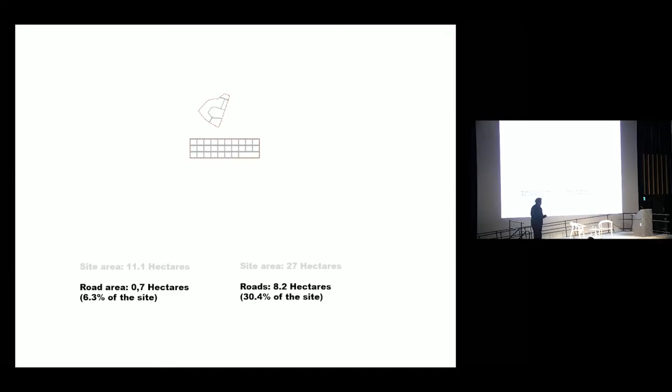And that's to provide the same 7,500 homes. And if you want to have houses, suburbia, and so on, you will need 420 hectares. And of that, almost 90 hectares will be roads. Interestingly, the percentage will be slightly lower, but it's an enormous amount of tarmac, of pipes, of water, and all the dissipation this entails—to produce the same 7,500 homes. A nice comparison between the three of them.

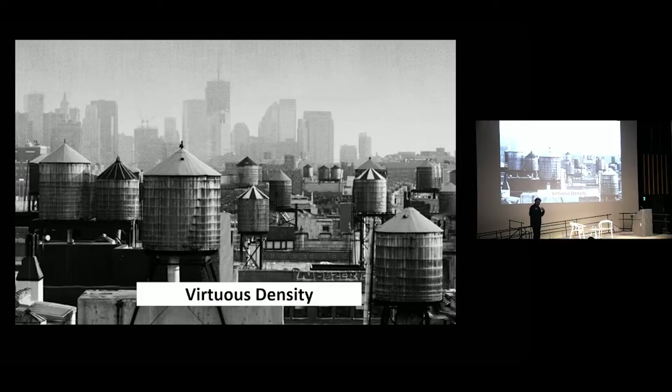Why does this matter to us? Because we believe in density. We intellectually and wholeheartedly believe that density is the answer to live in better cities, to have better places, to have better homes, to have better lives. And virtuous density—we believe that better places support more density, and more density brings more people, and more people make better places, and so on. That is the notion of virtuous density: the places that we cherish, places where we meet each other, and it's something we believe in so much that we put it in our own bags. Density is good, and that's that. Thank you very much.

Thank you so much. I bet you need a breather. Yes.

Well, gosh, that was a pretty rich lecture in terms of things to think about and talk about. So I'm going to try to choose a few highlights.

I couldn't decide whether to begin with your beginning or your end, but one thing that strikes me is that you talk a lot about the structure of experience at the ground plane, the pedestrian experience. So you have your tower picturesque, which seems like your effort to bring Camillo Sitte's picturesque Italian city into the world of towers. And then you talked about the way in which...